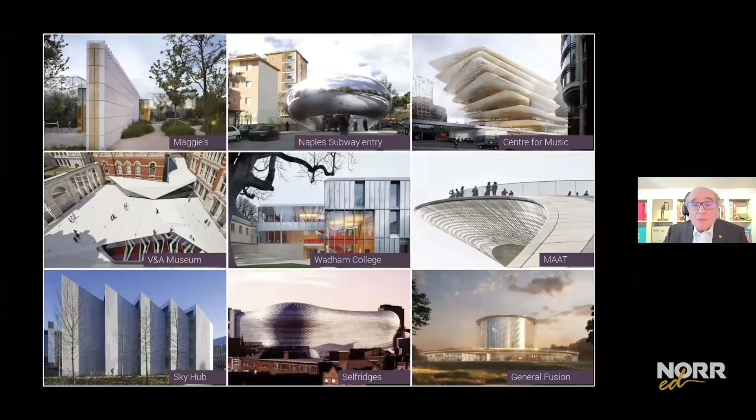This is evident in the range of ALA's portfolio. Some of the major ones are shown here in my final slide, as I introduce Amanda to share her presentation on the title, Architecture Really Matters. I turn it over to Amanda.

Hello, good morning and good evening to everyone, depending on where you are right now. Thank you, Silvio, and thank you, NORR Ed, for inviting me to speak, because what you've started is a really great initiative to share knowledge, to share experiences with different communities across the airwaves.

I start with this slide because I reckon that everyone has had something of a reset over these last two very difficult years, and for sure, we certainly have. After working in an open plan warehouse for more than 20 years, we've moved into a beautiful Georgian townhouse — the complete polar opposite of a warehouse — where we're reimagining the office as a family home, working in these rather grand rooms on multiple floors. It's a huge shift for us.

But there's one thing that we've kept from our warehouse days, and that's our no shoes policy. It's this kind of messy pile of shoes that's very emblematic of our culture — a group of very different individuals, but all with a common sense of purpose. And to clients who must also take their shoes off, I think it sends a kind of subliminal message that you are not in for a passive ride.

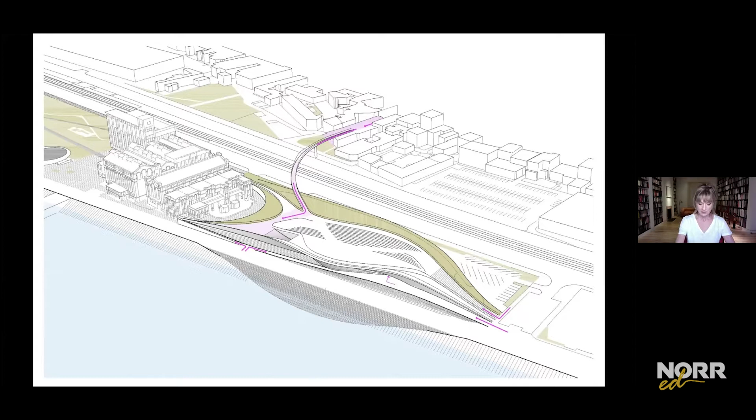We identified a small square on the other side of the train tracks from where we could span over the road without any need for steps and then land on the roof of the museum. Arguably, this simple urban move was actually more important than the architectural ones, because it became the generator for the entire design.

We not only made it easy to get to the museum, but we created a new public space on the roof. This is the opening weekend of the museum, when 80,000 people, almost 15% of the population of Lisbon, congregated, whether it was on the river, on the roof, or inside the museum. And it is now one of the most visited museums in Portugal, despite not having a collection.

And the roof is, if you like, a kind of elevated town square, very much part of the River Walk. It's a destination in itself and a wonderful vantage point to look out across the water. But maybe more importantly, to look back towards the city, giving you a completely different perspective of the city.

But perhaps what is most important is what we didn't do. Untypically for an architect, we did not build as high as we could have done, as high as permits would have allowed us to. Perhaps it's counterintuitive, but it meant sinking the exhibition spaces partly below ground and partly below the water table. But by designing a low-slung building, we preserved what was really important, which is the views from the city to the water and from the river back to the city.

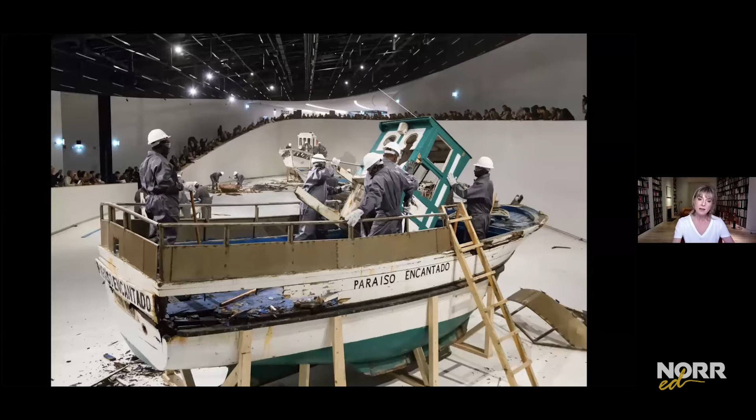And this is really a museum for big art. This is the oval space with an installation by the artist Hector Zamora, and from here you can enter all of the other gallery spaces. It's where one space blends into the next, because this is a museum where three disciplines come together.

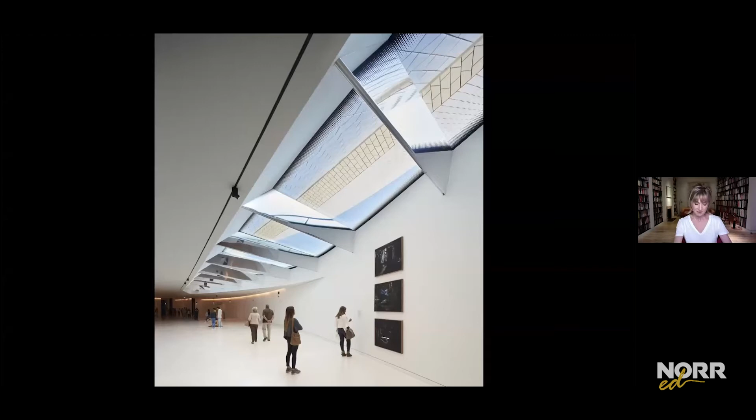And this is a gallery that is animated by natural light, with a roof light that's designed to let only north light in, and where you can look up and see the sky and the ceramic tiles on the underside of the shaded overhang.

Our focus with this project was really very much about its context and the waterfront, making places to sit close to the water where the steps go down to the river and where you can take shade from the overhanging roof. The facade of the building is extremely long.

So to give it a grain and a human scale, we designed a three-dimensional ceramic tile so that the surfaces pick up the different light conditions and articulate the facade. We were really inspired by Portugal's very rich tradition of craft and ceramics. But to add a further layer of depth to the 15,000 tiles, we used a crackle glaze.

It's a technique that dates back to the Song dynasty in China, and it was the result of an accident in the kiln. But realizing the delicacy and complexity of this accidental effect, ceramicists in the 13th century devised a way to reproduce it intentionally.

We deliberately chose a very neutral color for the glaze, because it's the light in this place that brings the color. And this is what happens at sunset - it's literally as though the building has caught on fire. And at dusk, it almost looks like pewter.

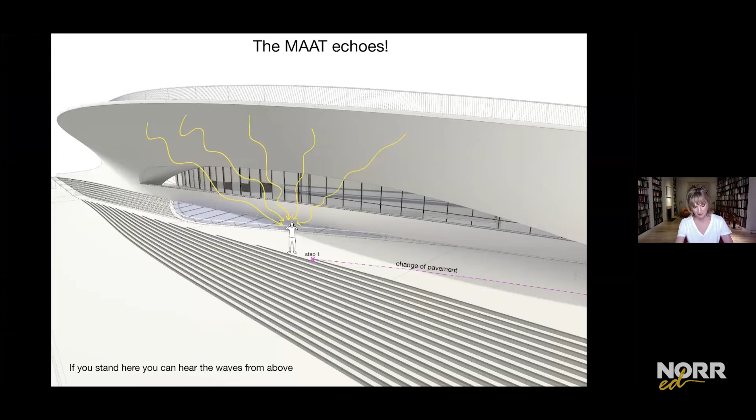When you stand under the overhang of the roof, you can literally hear the sound of the waves reflected above you. And there was another unexpected moment that we simply couldn't have imagined, when a group of musicians used the ceramic tiles of the facade as a musical instrument.

So moving to my hometown, London, the Victoria and Albert Museum. The original way into the museum is a rather grand entrance on Cromwell Road. It's the main traffic artery that runs east-west.

But our task was to design a second entrance off Exhibition Road, which runs north-south, as well as a vast space for the museum's headline shows. It was the biggest project for the museum in over 100 years, and very much emblematic of their progressive ethos. And progress in more ways than one.

This photograph from 1863 is of the V&A's original architects and engineers. 150 years later, in the exact same space, is a photograph of my team and our engineers.

This was the site for the competition that we went on to win, and it was very much a forgotten space in the museum that was used for plant and storage. But before I show you our proposal, it's interesting to remember what could have been.

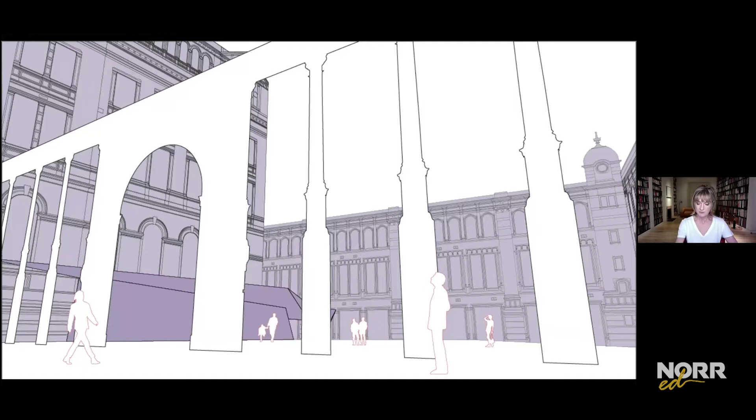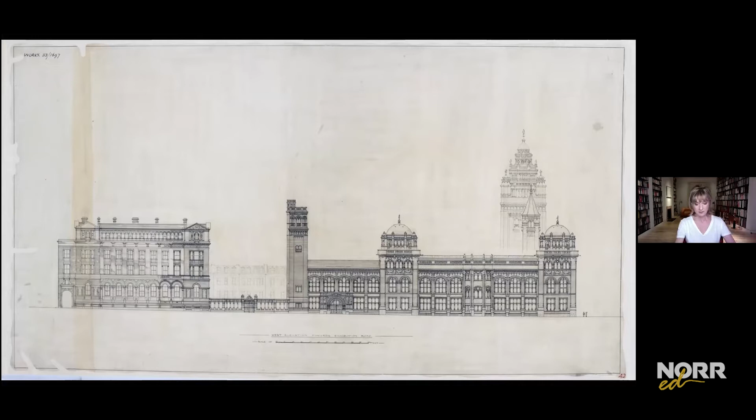Anyway, we won the argument, and the screen is now repurposed as a colonnade. And it was really this urban move that unlocked the potential of the project, creating a new public courtyard that invites you just to drift off the street and then into the new entrance hall that we've made inside the original structure.

We've taken down walls and we've opened up the windows to let the light into the new entrance hall. But this was all far from straightforward.

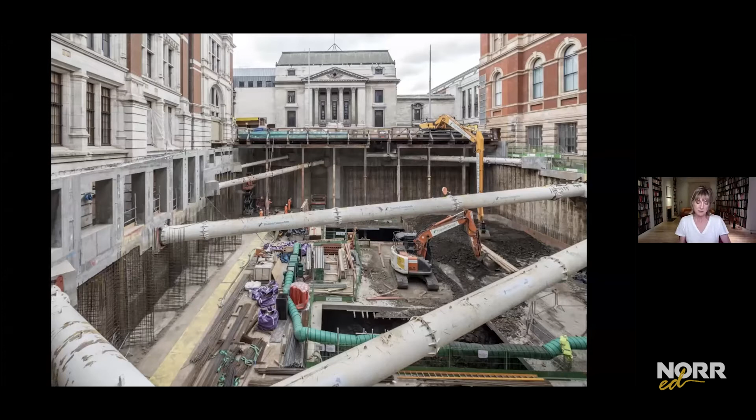We had to prop up the facades of the historic museum while keeping it open to the public, and dig a very deep basement and pile 50 meters down. Now, as all of you know, when you make a deep basement, you usually have a huge superstructure on top that prevents the slab from floating, but we didn't, we just had a courtyard.

Cambridge University, who worked closely with Arup, the amazing engineers for this project, was so taken with the structural audacity of our scheme that they asked if, purely as a piece of research and at their expense, they could install fiber optic monitoring cables in the tension piles, because they believe the relative movements recorded may disprove aspects of elastic theory, the theory engineers use to calculate this kind of thing. Certainly the data coming back is suggesting a different understanding. So without realizing it, but because we pushed it so hard, we may have actually advanced engineering knowledge.

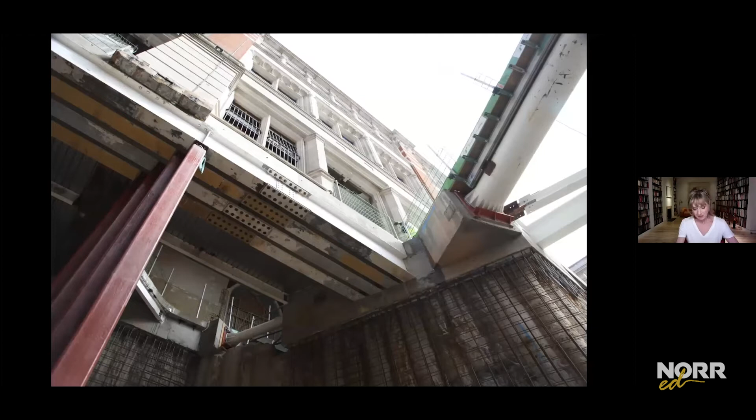In order to enter and descend through the original structure, which was very important to us to make the connection between the old and new, we had to underpin a wing of the museum. Throughout this entire time, the collection remained in place and the museum was open to the public. These columns and beams are literally supporting the weight of history.

So when it came to choosing a color, we painted them a color that really signified the gravitas of the engineering. International orange is the color of the first aircraft. They were painted this so that they could be seen against the color of the sky. It's also the color of the San Francisco Bridge, so it has great engineering heritage.

During the descent, as you go deep underground to get to the new gallery, we've manipulated daylight so that you always feel comfortable and always have a view of where you've come from. At the bottom of the stairs, there's this magic moment where there's more daylight than there was as you entered the entrance hall. It is this that makes you feel comfortable, even though you're in a subterranean gallery.

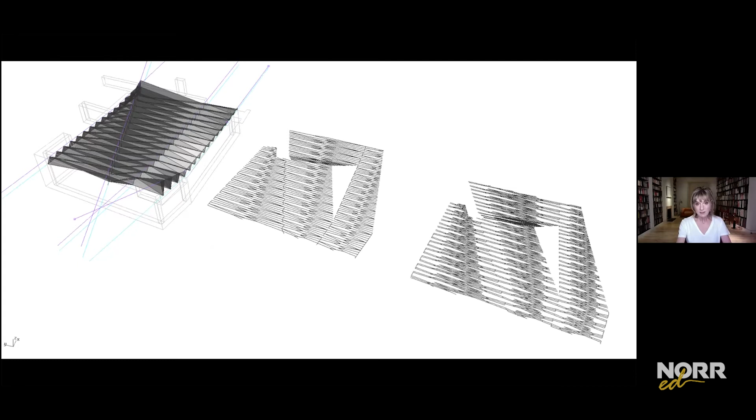So we took the geometry of the folded plate structure that supports the courtyard and is the ceiling of the gallery, and we flattened it as a two-dimensional surface. From here, we extracted a visually complex pattern but used only 6 tile types.

Taking inspiration from the V&A's mission of marrying arts and crafts with industry, we worked with Tichelaar, the oldest business in the Netherlands, and designed what is actually the world's first porcelain courtyard.

We set out to investigate the potential and the limits of porcelain and to recontextualize it in the design of the courtyard tiles. We looked at glazes from the Chinese Song dynasty of the 10th and 11th century, and it took months of research and working with these amazing artisans to get where we wanted. Eventually we ended up making the porcelain tiles with a slip casting technique.

To produce these tiles, the whiteness of the porcelain, which is so beautiful as a raw material, is offset by the shiny blue glaze in grooves in the tiles. We were so emboldened with the results that we tried to push it a bit further, and we wanted to extrude the tiles for the cafe roof. But there's a reason that people don't extrude porcelain, and that's because it doesn't work.

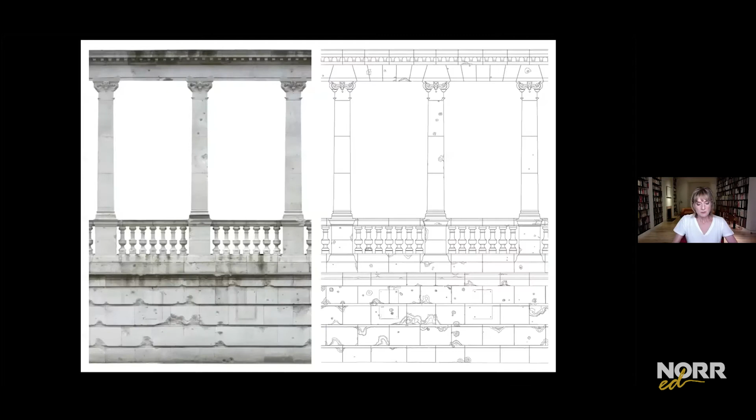But there's another paradox here, which is having gone to such huge lengths to open up the courtyard to the street, we then had to find a way of closing it at night. Everything we tried felt crude or impractical, whether it was conventional metal gates or glass panels that disappeared into the ground. It wasn't until we saw this survey drawing that we had commissioned of the original stone screen that we had our clue.

Because what this drawing does, it maps the outline of the shrapnel damage from World War II. So we found a way of memorializing this with a pattern of perforations in the anodized aluminium of the gates, and the perforations were all at a different angle, so that when you see the gates in their open positions from a certain angle, you're revealing the imprint of the shrapnel damage of the original stone, which has been removed.

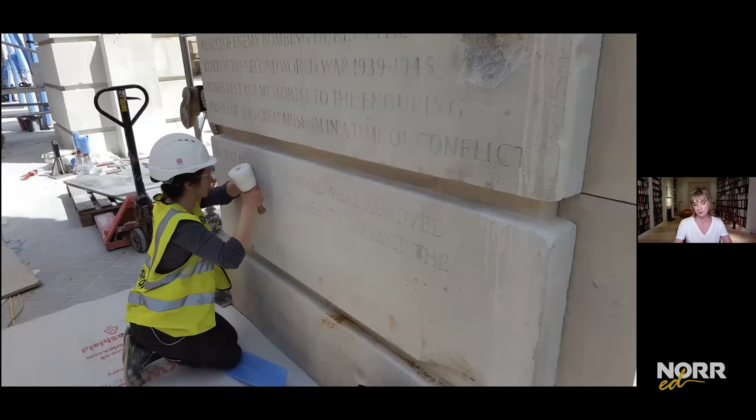The inscription here talks about the enduring values of the V&A during the war, and we've now added to the inscription to tell the story of the new gates and the memorializing of the shrapnel damage.

There used to be a royal crest above the central gates, but it wasn't part of our brief to include that. But there was something that Mark Jones, who was the then director of the V&A, said to me that really moved me. He said that it is important to remind people, and particularly politicians, how this museum came to be.

And so with that thought, we found a way to express the crest, the royal crest, but in a very contemporary way through perforations, but this time they were all perpendicular in the central gate.

This photograph really speaks of tradition, but the way the public use the courtyard has been transformative. It's changed the way people see the museum and the way the institution sees itself. And just like in Lisbon, it's sometimes the things you don't do that allows the unexpected to happen. That's why we didn't clutter the courtyard with all the paraphernalia that goes with an entrance, and why we kept it as flat as possible so that the public be able to appropriate the space, and to be able to just let the life of the city into the museum.

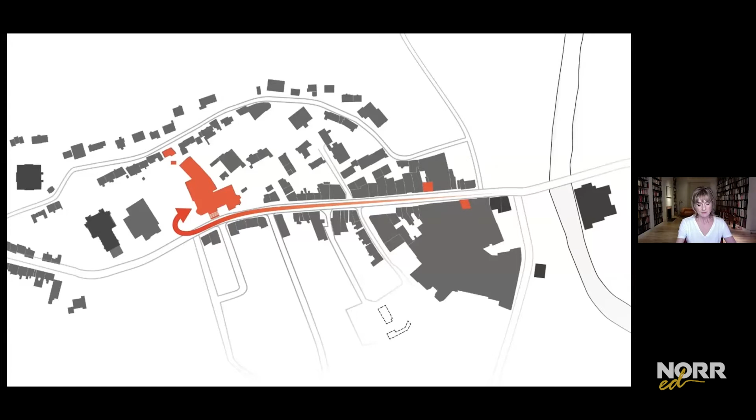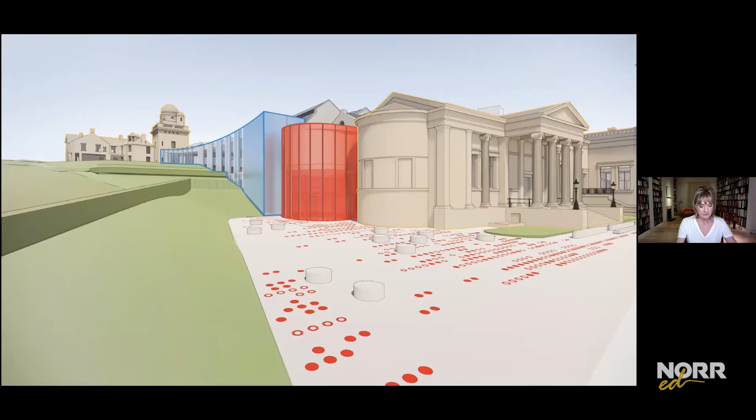This red line, a fil rouge, if you like, was inspired by the humble cotton thread, and it weaves its way along the high street, leading to the new courtyard and entrance. In the courtyard, the cylindrical geometry of the new entrance echoes the form of the historic apse and is this kind of pivot between old and new.

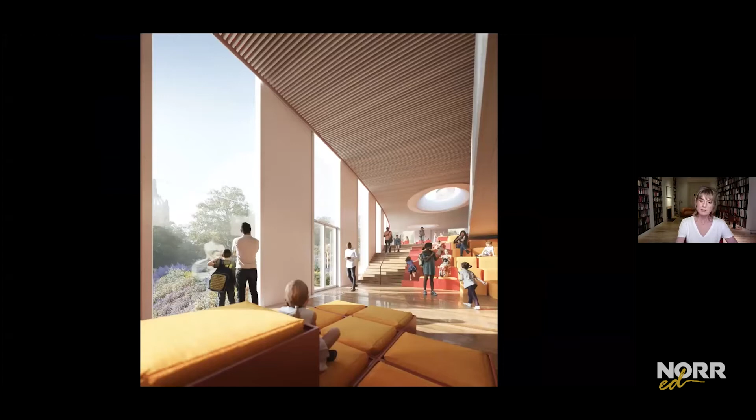And inside, we're breathing new life into the historic galleries and making them completely accessible for everyone, which they weren't before. The new wing is really about creating social spaces in a museum and connections between the new garden that we've designed and the museum. You can see here the roof light, which actually frames a view of the observatory to make it feel closer and more present, more part of the museum campus.

And then a very different campus here at the University of Oxford. Wadham College is a very progressive place. It was founded by a woman, it's where the Royal Society started, and it was the first college to go co-ed and the first to fly the rainbow flag. However, the wider culture and context of Oxford colleges can be really intimidating to students, and I might add to architects too.

But addressing this duality of history and progressiveness is, for me, what this project is all about. And it also speaks, I think, of the importance and generosity of two alumni whose transformative social and educational experiences inspired them to give back.

The two buildings here, they're linked, but they're separate. The brightly coloured internal stair is what unites the two buildings. And when you enter, we want the students to feel a really warm sense of welcome in a space that speaks of youth and modernity, but also of coziness and aspiration. And it's the transparency that reveals the life inside the college.

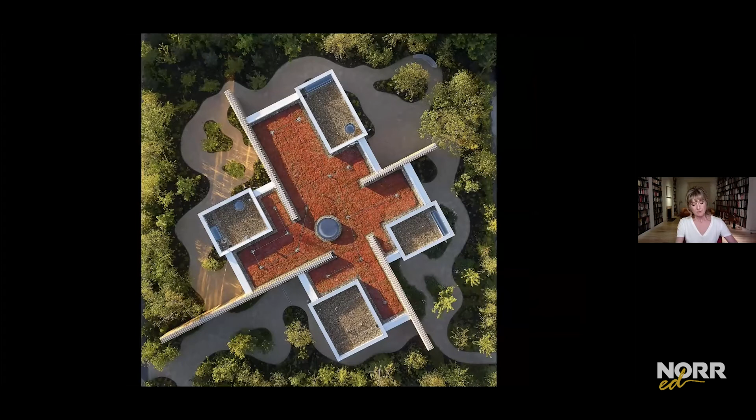And we wanted to imagine that there used to be a piece of the New Forest here, which we carved into to make space for the building. It's a very simple plan, a central space from which all the others radiate, but it's surrounded by nature, as though nature was there first and then the building.

And we've used ceramics again by Cumella, the same people who made the tiles in Lisbon.

Ceramics is a beautiful material, but it's a material that comes from the earth, and it plays very well with nature. This ceramic blade wall is what leads you into the center, where we wanted to create an oasis of calm.

In the central space, the hub if you like, the soft light from the roof light really marks the center of the space, where cancer patients and their families and friends can sit together and be with other people going through the same kind of experience.

Off this central space are the more private spaces, but always with a view of nature. And now with the planting much more mature than in this picture, you can no longer see the car park.

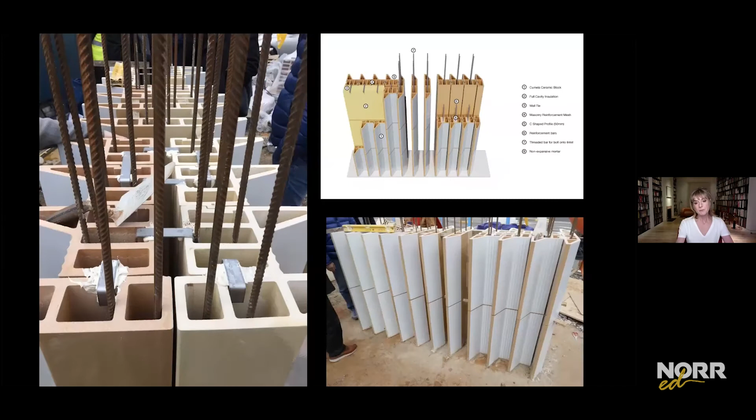Each side of the ceramic blades is a different color. All the colors are always soft, muted, and sometimes we just reveal the color of the clay itself. But we used the ceramic structurally to support the roof, and this involved months and months of trial and error. Some of it we did ourselves in the yard of our office, because using ceramic structurally, as far as I know, hasn't been done before.

And learning from our experience at Lisbon, we knew to give a gloss to the glaze so that it will pick up the different lights and reflect the shadows of the trees.

As much as possible, we want the building to feel as though it's just grown from the landscape, because that brings a sense of well-being to people, and that's what this project is about. We picked colors that correspond with the bark of the trees in the landscape, designed by landscape architect Sarah Price. We used a rippled surface on the stainless steel cladding to give a more subtle reading of the landscape and amplify it in the building itself. It really, it just beautifully captures the rays of the sun.

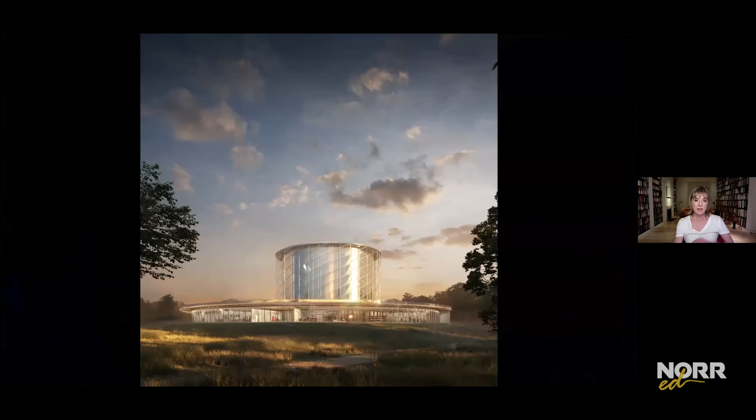What we've set out to do is find a physical way to express the extraordinary power and promise of fusion, and to make fusion palpable, both from inside and outside the building, because we want to inspire the people who work there, engage the public, reveal what goes on, and set up a new benign relationship between nature and technology, because by doing that we can take away the fear.

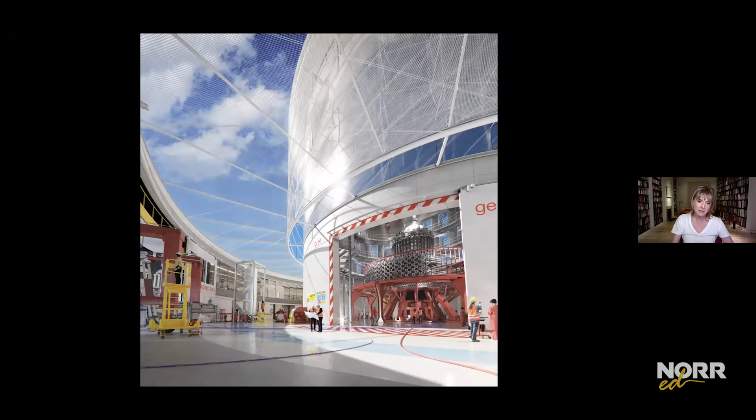So the architecture of this prototype plant, which is being built in Culham, just outside of Oxford in the UK, needs to capture the technological optimism that fusion is going to solve the problems of the world in energy terms. As the first facility of its kind to be built in the world, this work needs to be seen.

And so we're making it very visible and very transparent. But this is what architects do—we message big ideas through buildings without the need for words. We're using design to visually soften what is a very hard industrial technology, but it also has a technical purpose, because this outer skin, a very fragile looking ETFE, creates a solar chimney that will naturally cool the fusion island for most of the year.

The exhibition spaces, offices, and labs are all arranged radially around the fusion island. The fusion island itself is a concentric circle, so we wanted to express that in the way the building was arranged and the way you see the building. It also means that wherever you are, you can look to the left and see the science, or look to the right and see nature outside. It's this sort of reciprocity between technology and nature which tells a story in itself.